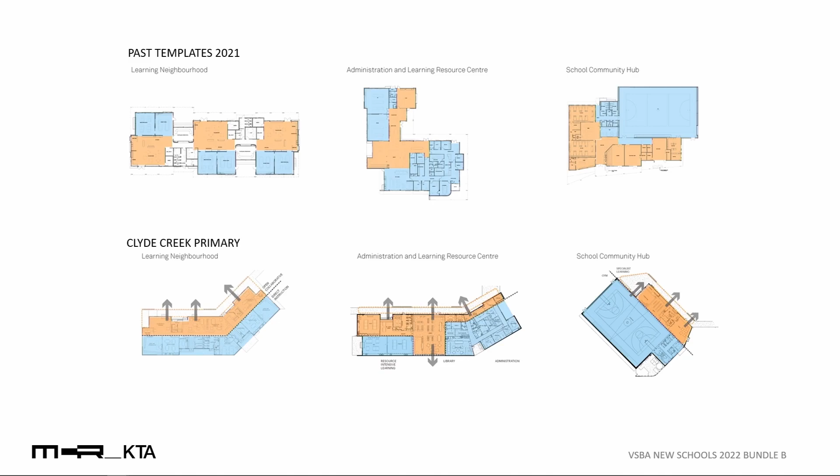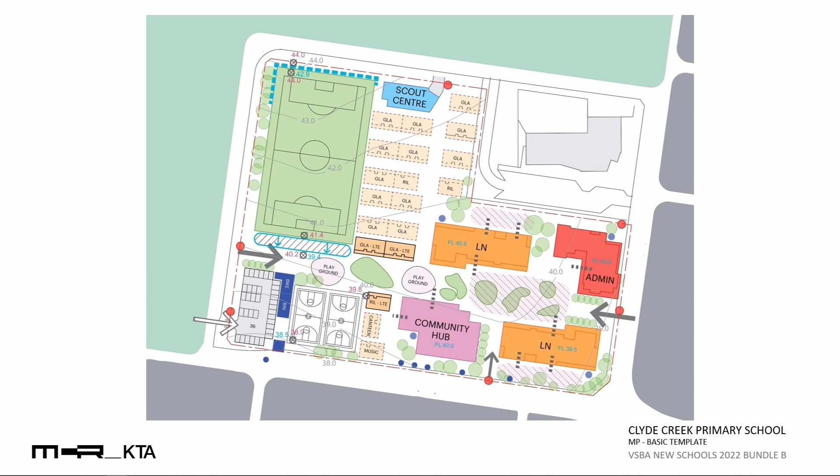So in the master planning and SD phases, MCR and KTA worked closely together and, to be honest, quite frantically due to the type of program, to try and find a better balance between the template and the individual contextual needs of each site. A simple tweak of those templates, a crank, facilitated a new series of variations of building footprint. Clever strategic siting of these structured the campuses, defining interstitial and circulation networks without the need for bespoke moves.

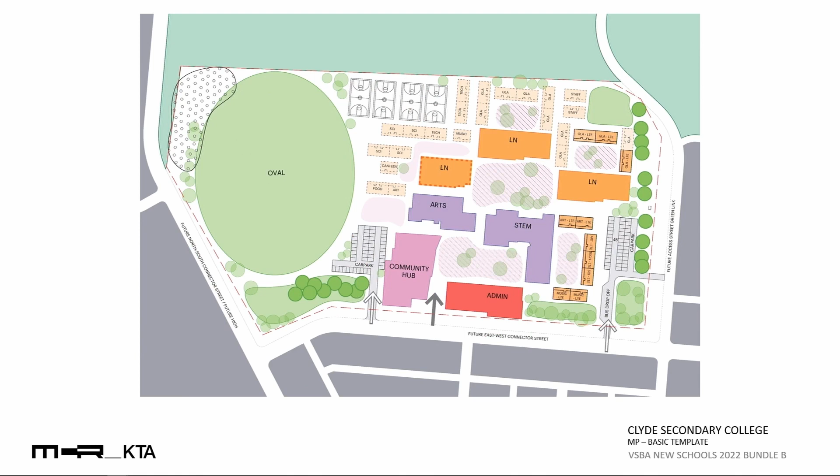At Clyde Secondary, we could use the crank forms to slide more naturally along the contours of the site, maximising both accessibility and working with the site's inherent qualities.

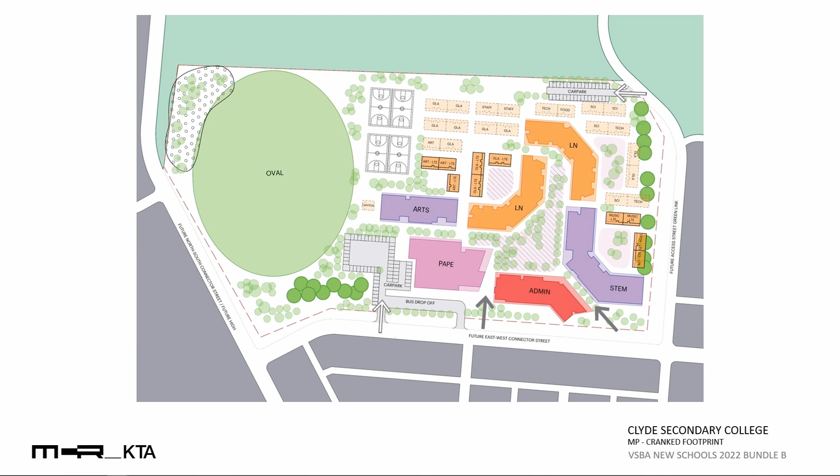In the secondary school campuses, it also allowed us to think about the quality of the school in the early funding stages.

These simple figure-ground diagrams show the combined strategy of the cranked buildings and the resulting enclosure of well-defined main central gathering spaces, which we refer to as the civic hub.

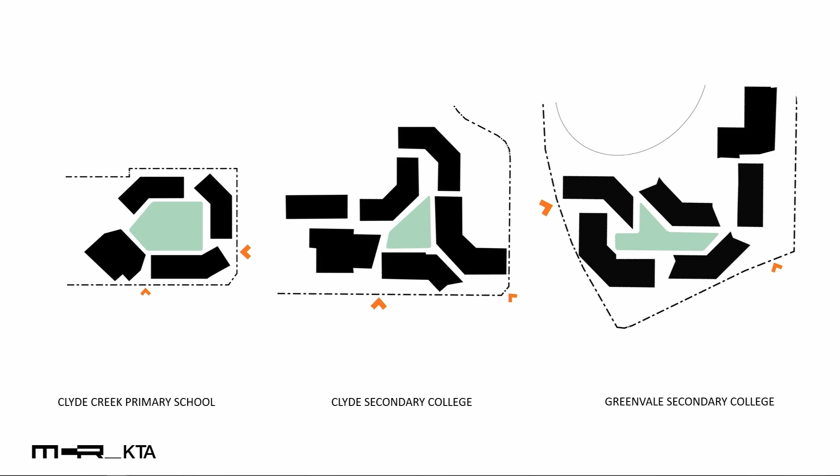Clyde Secondary College's master plan is shown here. It shows how, framed by learning neighbourhoods, administration and resource centre, specialist facilities such as STEM, visual arts, performing arts and physical education, these civic hubs become a focal point of the campus, a large space for gathering with pockets for outdoor learning and play. This quality is even achieved at the initial stage 1 builds on the secondary schools.

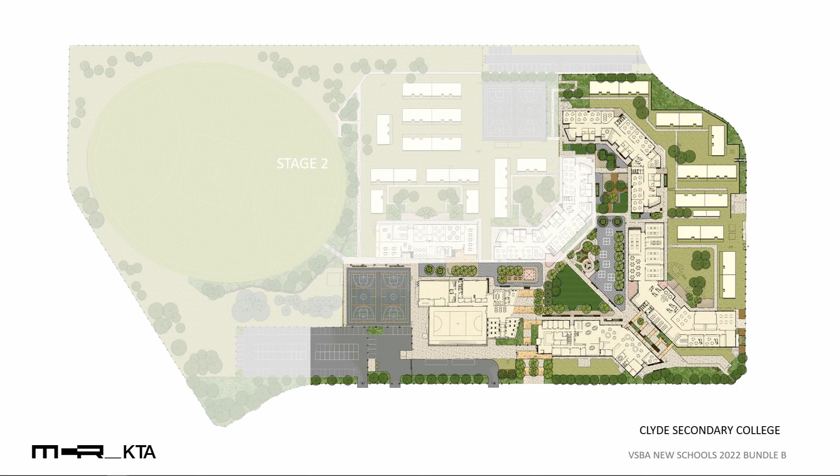This approach, where the building can wrap and hold the civic hub, we felt gave a greater sense of intimacy and place to the schools than the grid approach prevalent in their earlier models. It forced us to resolve issues of orientation, to provide deep eaves for shade and shelter, and particularly on the large secondary school campuses, to provide distinct identity and entry points to the various school buildings.

Partway through the sketch design phase, the team made a decision to continue working closely together, but for MCR to focus on developing up the secondary schools and KTA to focus on the primary school, with some select buildings within the secondary.

Working on the common DNA of the planning, each practice developed the schools based on their own unique approach and interest, with a real focus on the actual cohorts that they were designed for.

Just as important as the school's internal environment was the way that the new schools addressed the street and the suburb, creating a sense of civility, entry and legibility to places that, as they mentioned, were quite recently fields.

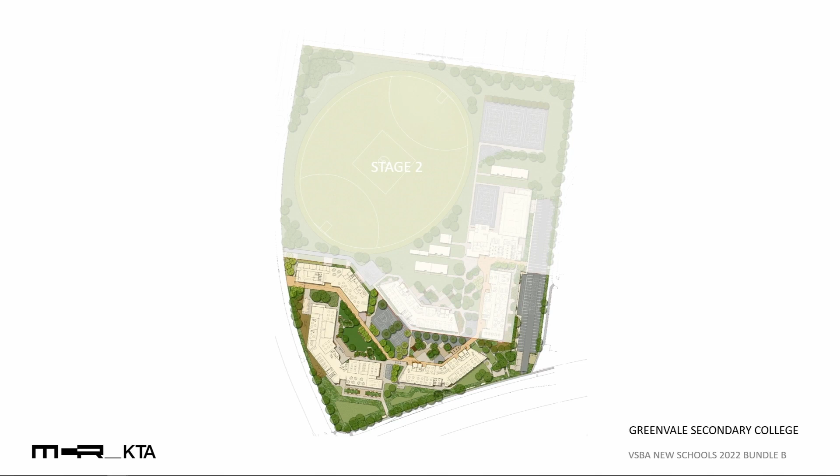So the cranked plan model was not only the basis for the more nuanced site planning, but a better, more articulated pedagogical plan type, which in the secondary schools accommodated formal instructional spaces and open collaboration spaces, along with a range of informal semi-enclosed spaces and spill out to outdoor learning.

The nature of these projects means there is no end user that you're working with. The school principals aren't appointed until 6 months before the school actually opens. So to design the schools, we worked with the VSBA and their appointed user representatives, who related lessons learned and past user experiences to assist in the design process.

We know from our experience educationalists' opinions on the types of spaces needed for particular groups. The floor plans needed to be adaptable to changing curriculum and pedagogy, facilitating many modes of operation, so balancing flexibility with purposeful and accessible spaces.

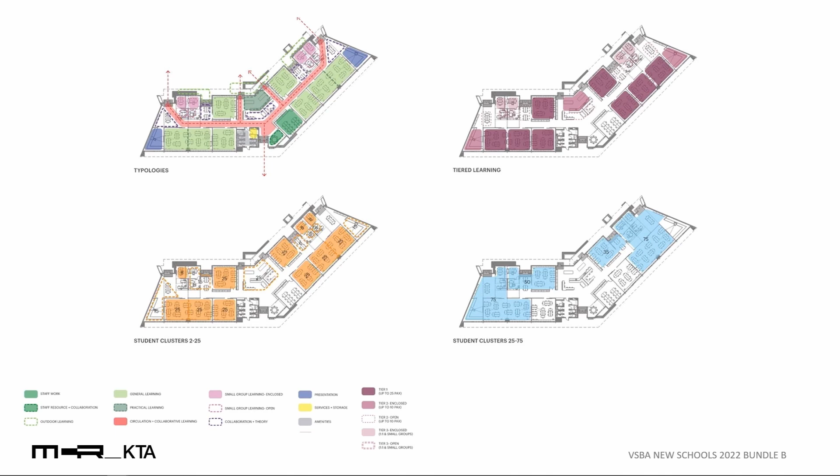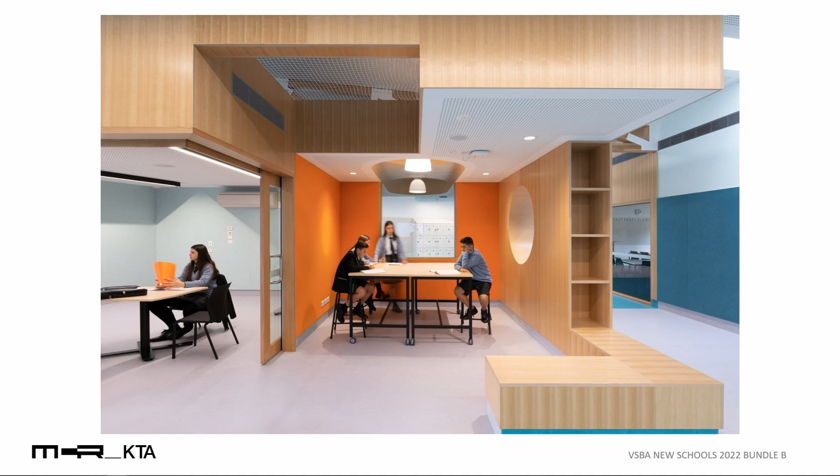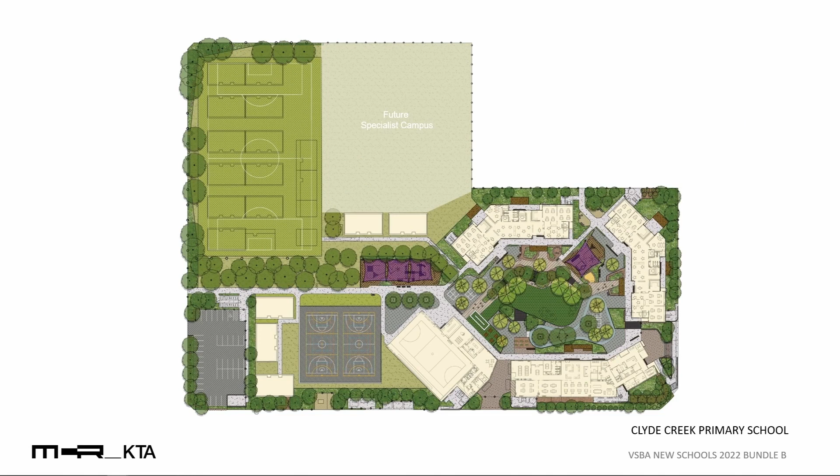With no principal, we knew these spaces needed to be adaptable to both teacher-led and collective inquiry modes of learning. So joinery, volume and material are used to create pockets to support different group sizes and modes of learning.

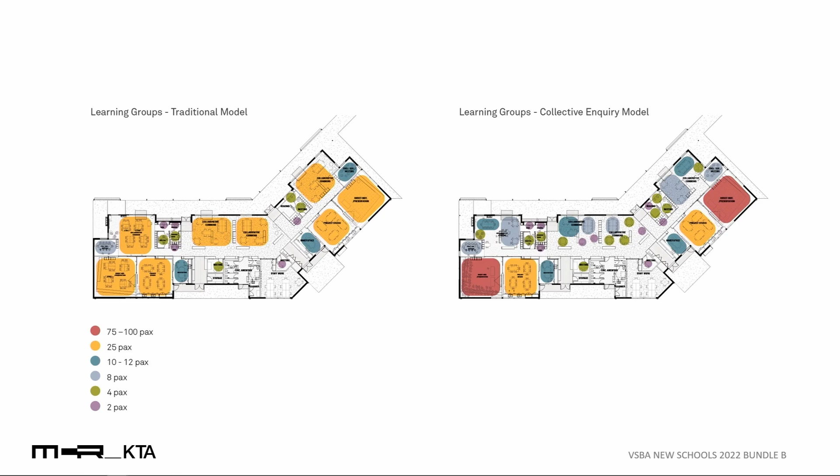This diagram shows how the building can be used and operated by the teachers to support activities of all sizes. The more collaborative spaces face the civic heart and have a larger volume with exposed trusses, while the more program-driven spaces sit on the back of the plan.

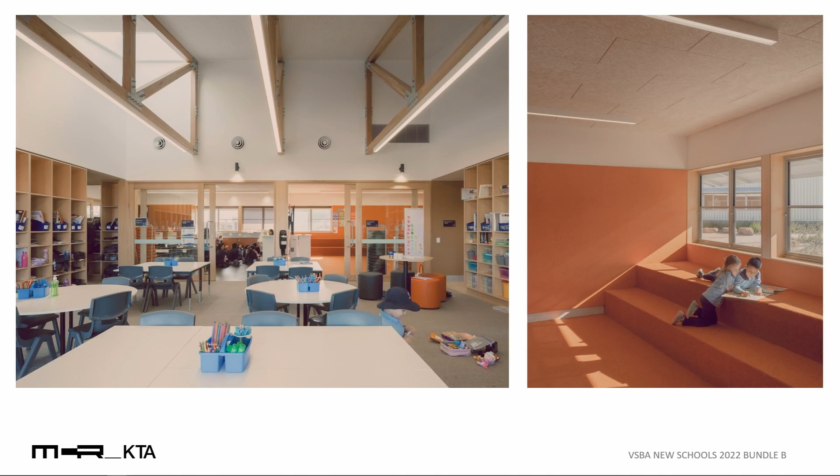A consistent datum of wall linings joins the larger volumes with the smaller, focused ones. Careful additions of joinery indicate areas for more focused and quiet inquiry. And the teaching spaces are designed with the outdoors to spill out beyond pergola and into the civic heart.

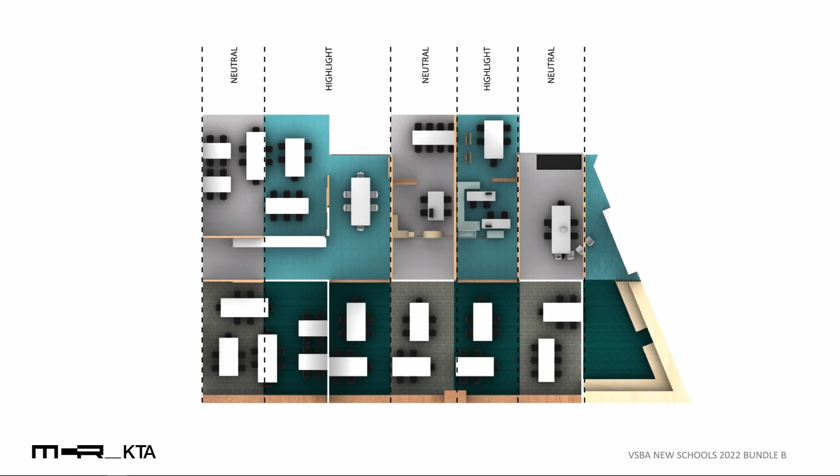The project used a hand-in-glove approach to the incorporation of pedagogy, the structure, acoustic and display needs, interior design, and the use of sustainable materials, where the structural rhythm of each is informing the other.